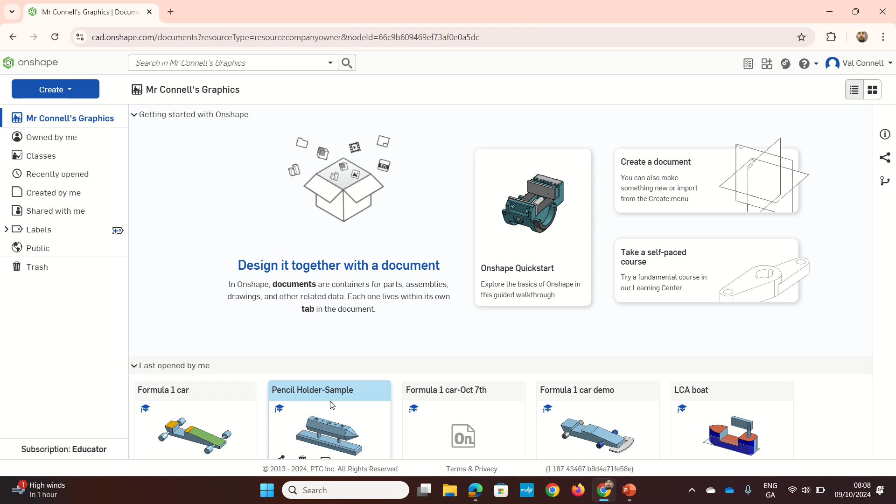Now, welcome to this Onshape video where we're going to make a little pencil holder that we might make in junior cycle wood technology. So you might be familiar with having made something like this in wood technology.

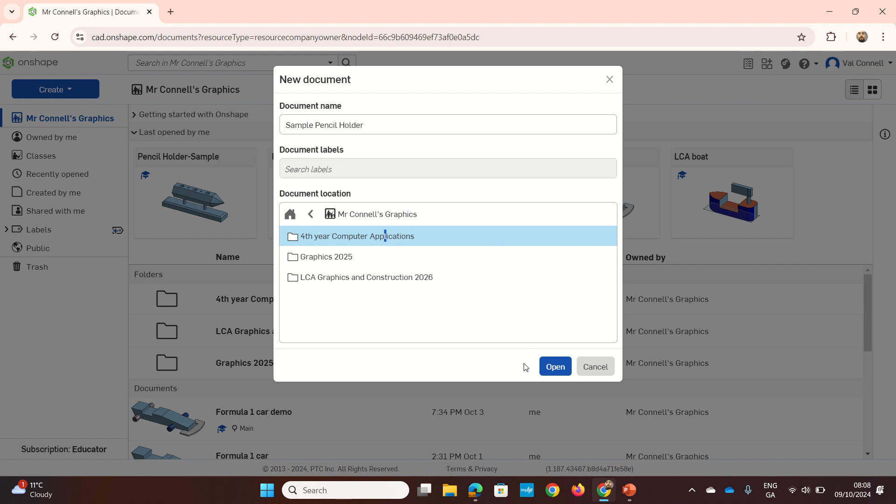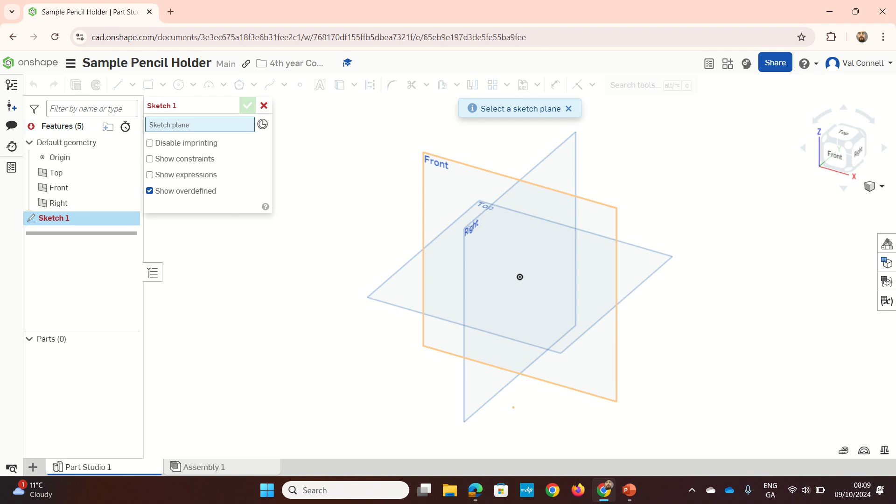Right, so we're going to go to create, document, we're going to name it there and open. Now, we're going to start here by going sketch, and then we're going to select the right plane here. So the right plane down here, we're going to hit that. Then we're going to go up to the cube. I'm going to select the right plane here.

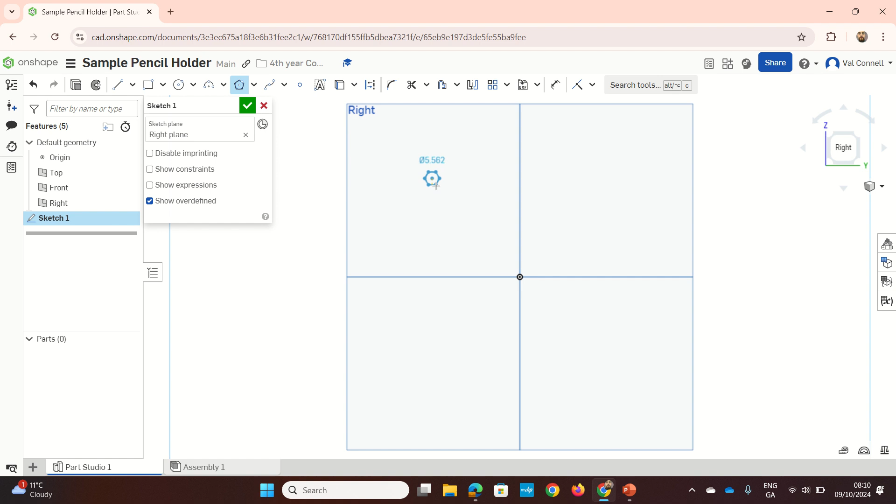Now, we're going to go up to polygon. So the tool is up here. And we're going to left click out here, move our mouse out and left click again. Now, it's going to ask for number of sides, so we'll leave it on 6. We're going to go D for dimension. We're going to left click an edge. So I'm just highlighting the top edge. Left click it, move the mouse up, then click the number. I'm going to type in 20 mm.

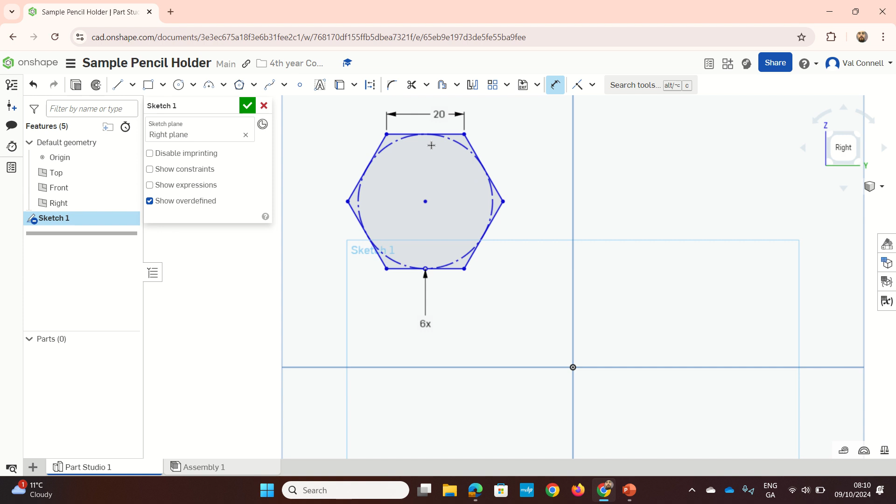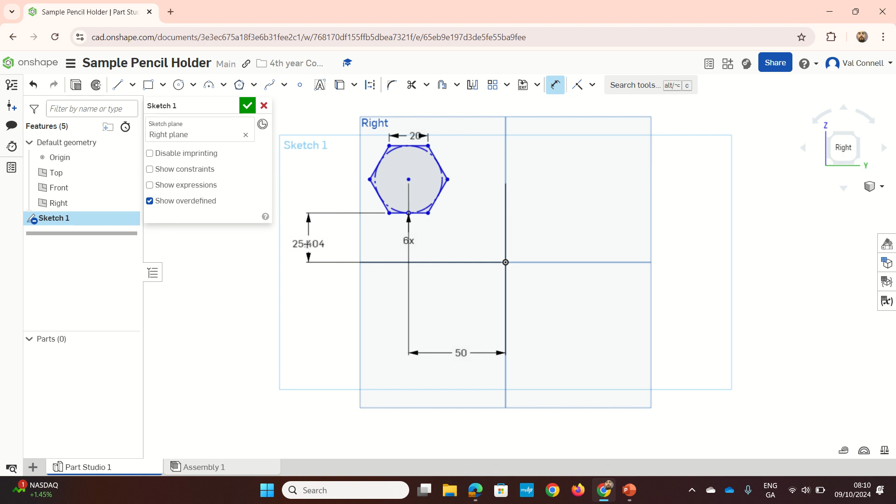Now, we're going to left click the center of the hexagon and left click this right plane here. We're going to move our mouse down. I'm going to type in 50. And then we're going to left click the base, left click up here, and we're going to type in 50 as well and enter.

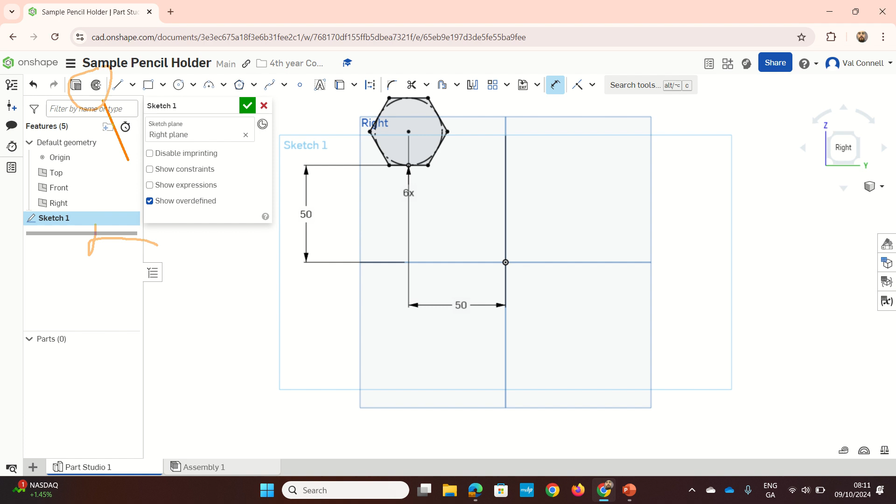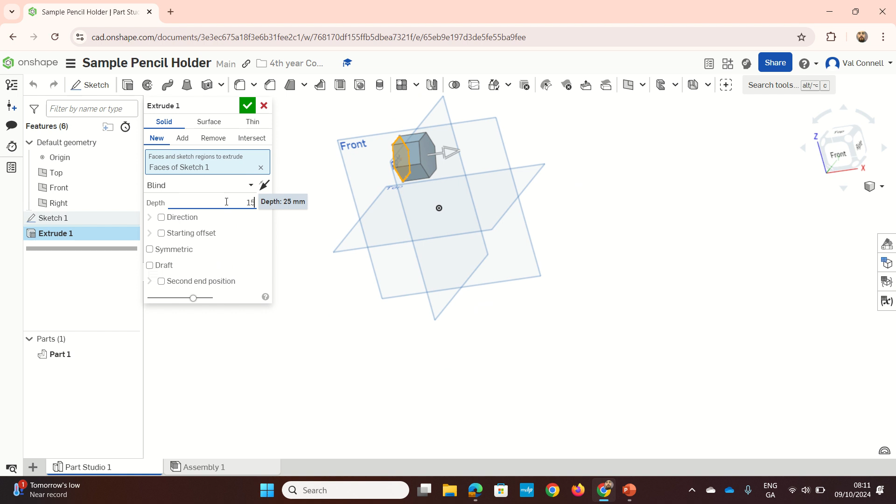Then we're going to go up to our shift and E, or extrude. So this one up here, or that button, you can press the commands shift and the letter E, and then it brings us into extrude. So we're going to type in 150. I'm going to click OK. Now, some of the pencil body is done.

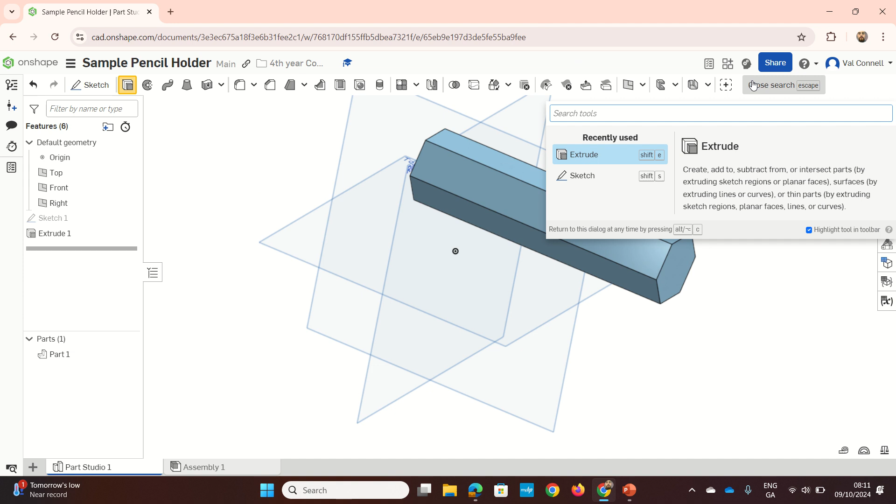Right, now we're going to put a point on the pencil. So we're going to go up to this command called plane. So it's up here. Or if you're looking for it, you can type in the name plane. So I'm going to select down here in the second bar, I'm going to go offset. I'm going to type in 50, click enter. I'm going to select this face here and press OK.

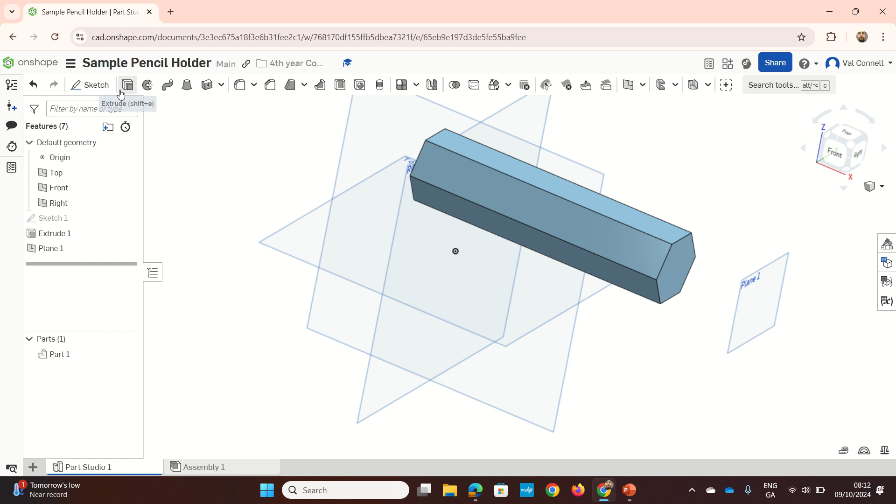Right, now I'm going to go to sketch. So I'm up here at sketch. I'm going to select my plane 1. I'm going to go to the right plane. I'm going to go sketch point here. So point here. Now, I'm going to grab the center here. And now it's proven difficult to find. So I can move my mouse over here and right click on sketch 1 and press show.

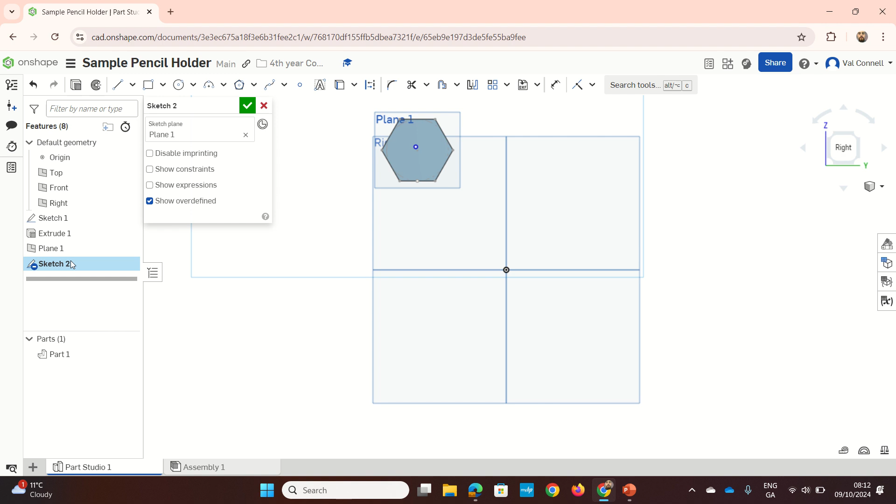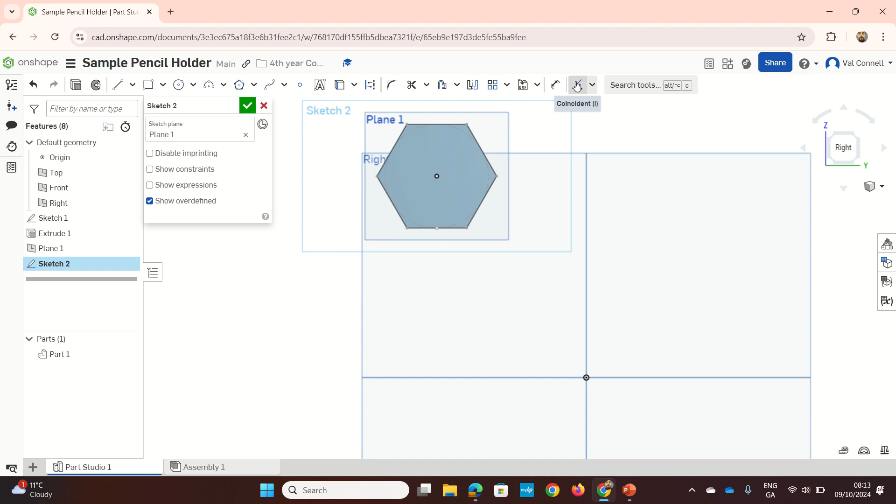Now if I can drag the point there. I'm just going to zoom in. So if I hold down left click, I'm trying to get these to snap on. But it's proven difficult to get it to snap on. So I could left click and left click that and press the letter I. And then they snap on together. So that made them coincident. So that button there. Now I'm going to click OK.

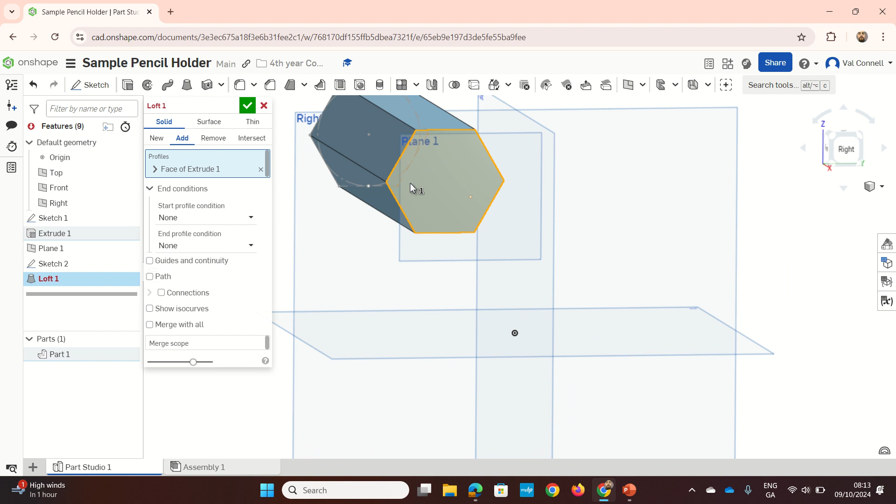Then I'm going to go to this loft tool, which is up here. So I'm going to select loft. I'm going to go add. I'm going to click the face and the point here, vertex of sketch 2. And I'm going to click OK. So that's the tip of our pencil.

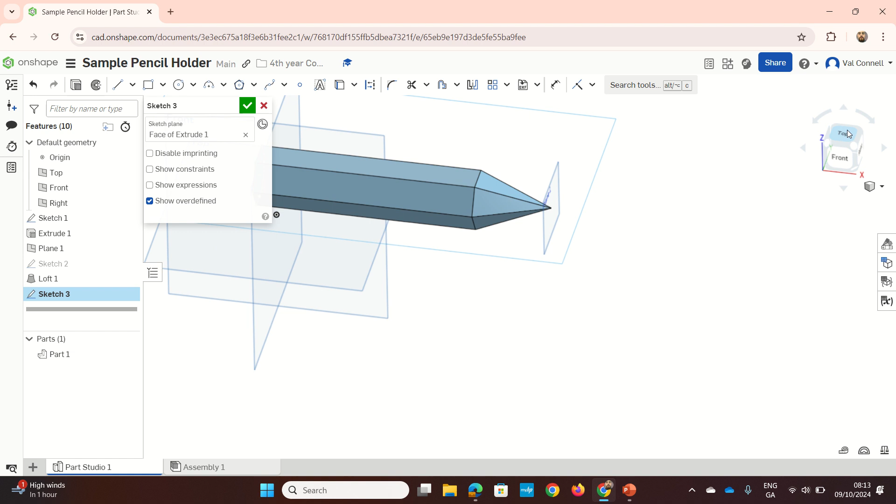Now we're going to put the holes in for the pencils. So I'm going to go up to Sketch. So we're up there at Sketch. I'm going to select the top face. And I'm going to hit the top of the cube here. I'm going to press L for line and Q to turn it into a light line.

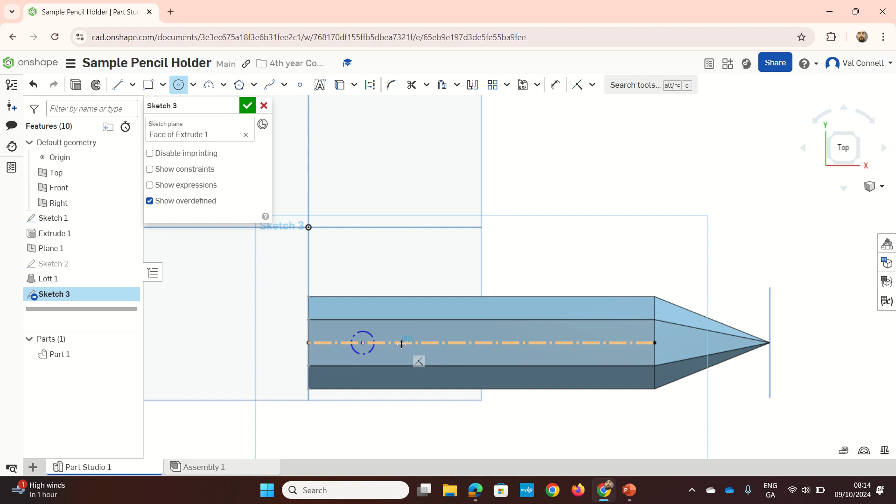So I'm going to left click, move the mouse over to the right. I can press C for circle. So I'm going to draw 1, and I can turn off Q there. 2, 3, 4, 5, and 6. Now, if you want to put in more pencils, that's no problem at all.

You can do. Okay, so you can put in more holes if you want. Now, if that one's still in construction, you can left click it and press Q. Now, size of these holes we'll add in.

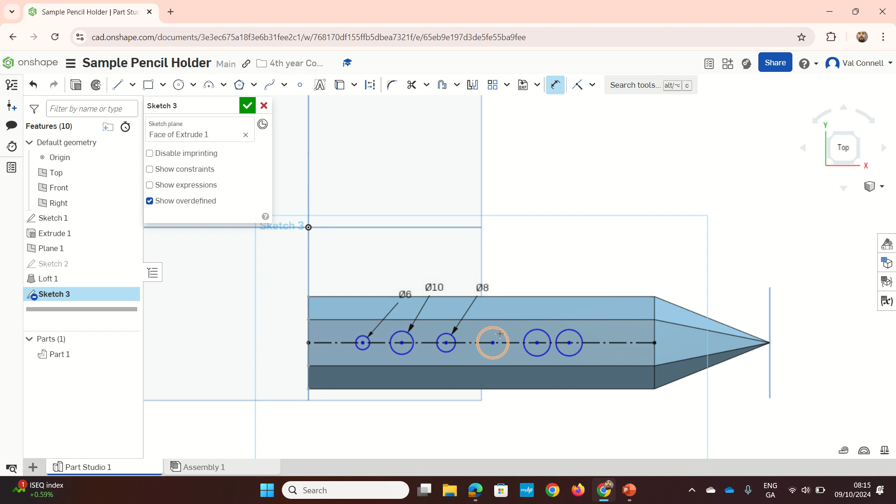So D for dimension. I'm going to give this one the size of 6. This one the size of 10. This one the size of 8. Really, the size of the hole depends on the size of the pencil. Okay, this one the size of 14. 6. So you can choose these sizes yourself, whatever you want to put them in.

Now we're going to dimension these, so I'm going to left click side here. I'm going to dimension that 25, and this is 20. So the dimension tool is still on. So I click the point and that point of the circle. So you're clicking between the points of the circles, you move your mouse up and change the number then. So I change that one to 15. Well, I'm actually going to go back there. There's no point in going to change that back to 20.

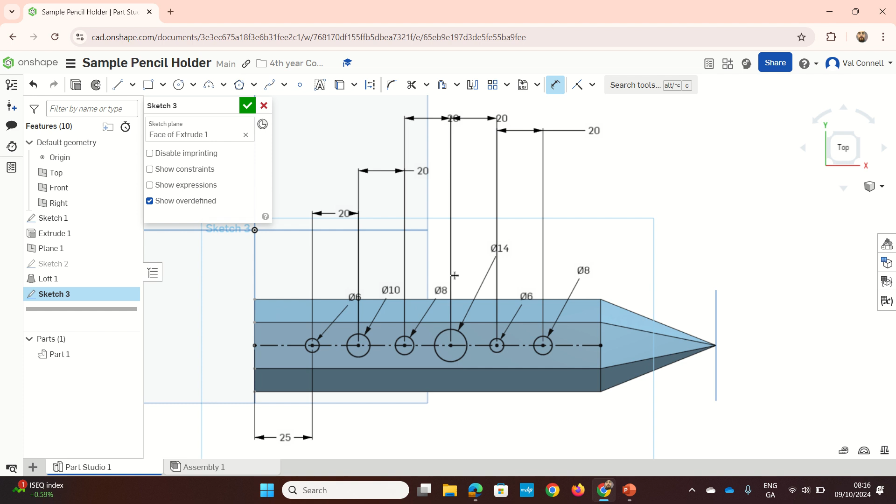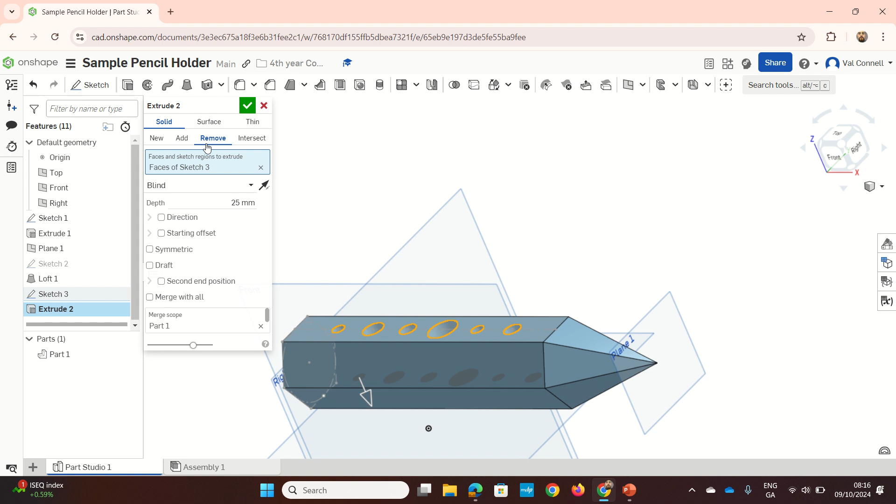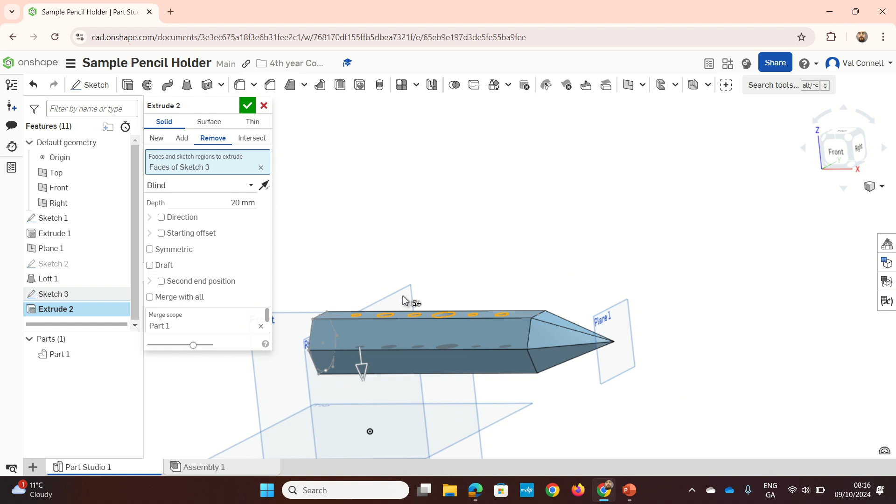Now, we're going to go and cut those holes out. So I'm going to go to extrude up here. You can press Shift and the letter E on your keyboard and bring your mouse up to it. Now, we're going to change this to remove. So it's going down. Now if you brought the arrow down, it'll bring them the whole way through. But we're not going to do that because then it'll just fall all the way through. So we're going to leave this at 20. And we're going to click OK. So we have the holes cut out.

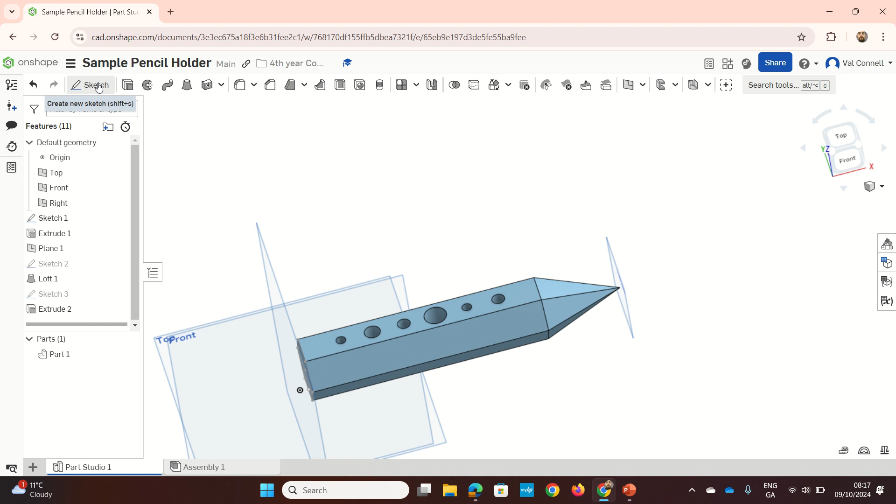And now we're going to drill the holes for our dowels and put in our dowels. And then we'll do our base. So I'm going to go up to Sketch. I'm going to rotate the model around and select the bottom face. So the one directly underneath the holes. I'm going to press the underside of the cube there. I'm going to press L for line, Q for construction line. I'm going to draw a line from left to right.

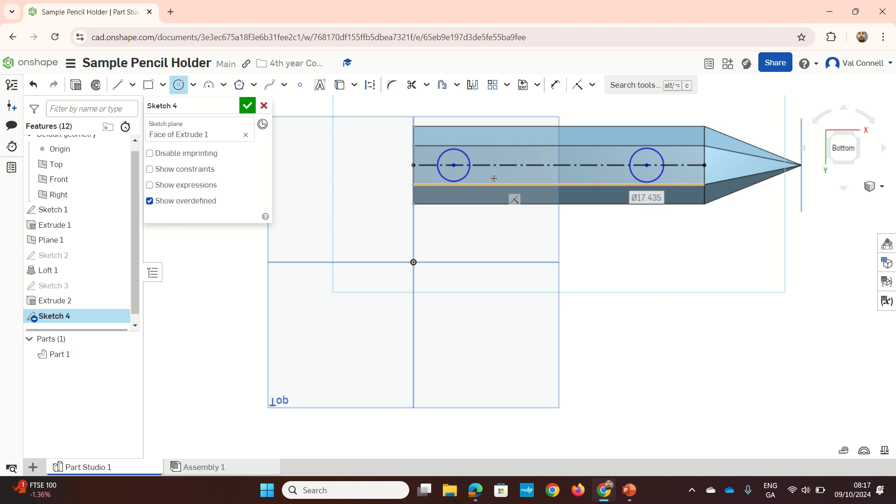Now I'm going to press the letter C for circle, or you can hit the command up here. So I'm going to draw in the circle, and I can press Q to turn off Q to stop it being a light line. Now I'm going to go D for dimension. I'm going to type in 10 for the circle, and we'll give this a distance from the side. So I'm going to left click the circle and the bottom. I'm going to type in 15. And then over here, I'm going to do the same, 15.

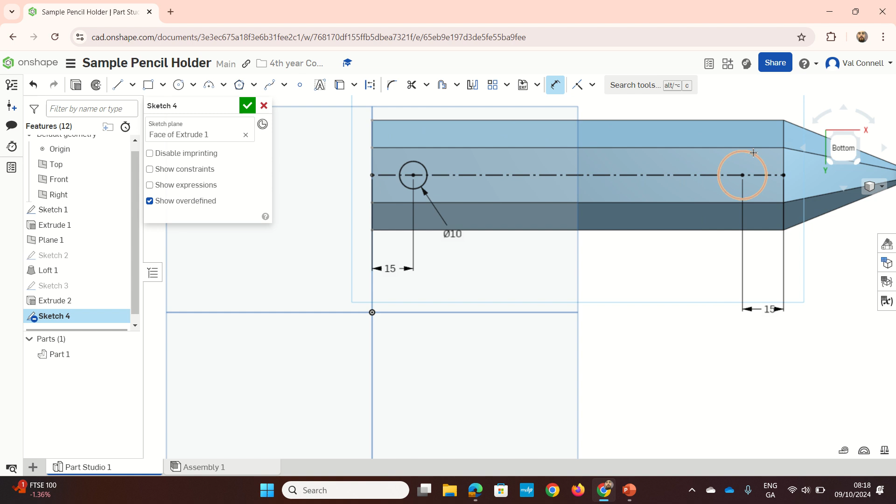And then we can give the size of the circle 10, or another way you could do it is if I deleted that dimension, I could left click this circle, left click the circle on the left and press E for equals. So if you change this dimension, that one on the right goes up accordingly.

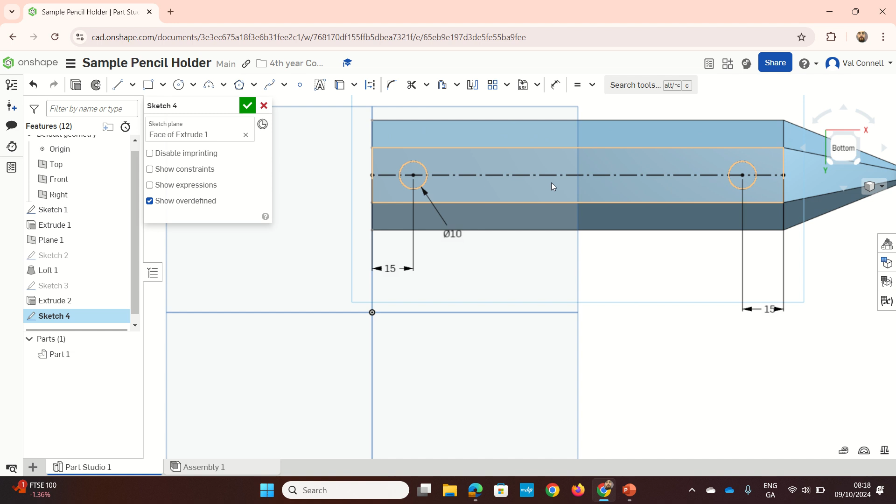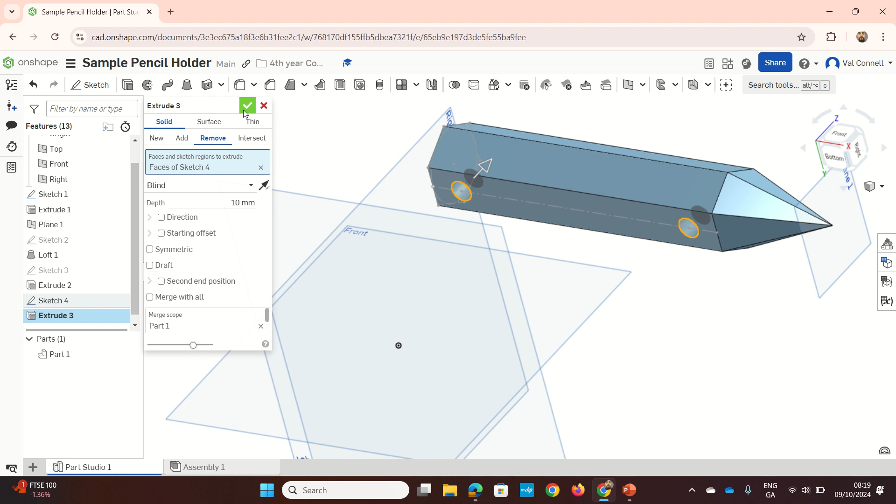Now, we're going to press Shift and the letter E, or we're going to go up to extrude. We're going to select remove. We're going to type in 10. Okay, and then we're going to click OK. And there the holes for the dowels are done. Now we're going to do our base.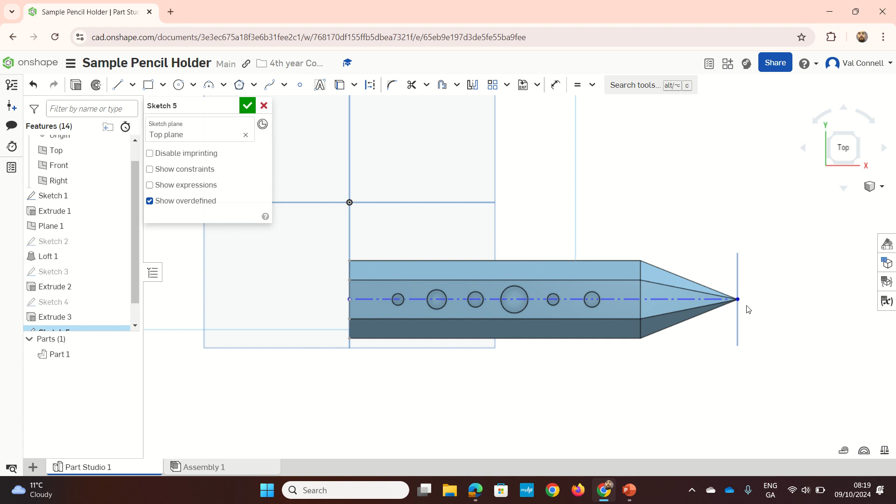Right, so we're going to go sketch, select the top plane, we're going to hit the top cube. Now we're going to press L for line and Q for light line. It's struggling to snap on, but we're going to draw a line from left to right. Okay, now I want to get this to snap into the middle. So I'm going to left click that point of the line and left click this one and press the letter I. And there it's gone. Now I'm going to go up to the rectangle tool. I'm going to hit the drop down arrow and I'm going to go center point rectangle.

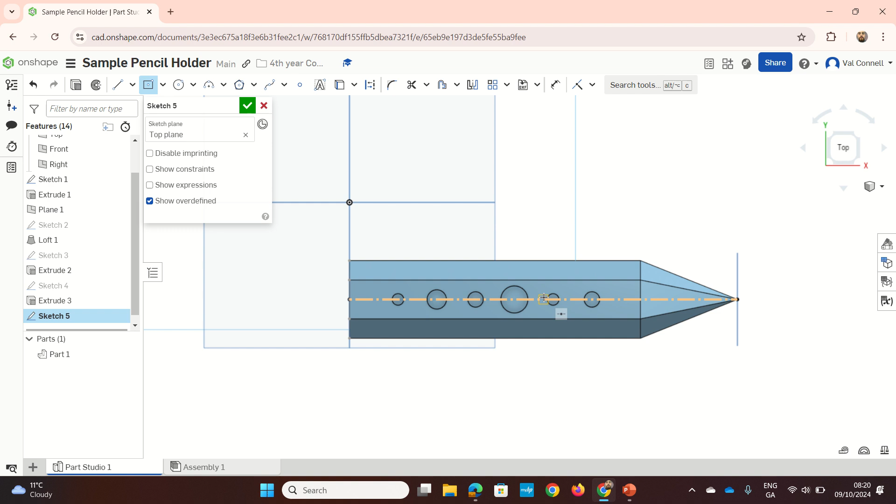Now I'm going to move my mouse along this line here and wait until we see this little square popping up. So you see the little orange square there that popped up. You can see it there. So that's what we're waiting to get. Now when we get that, we left click and we're going to move the mouse outwards.

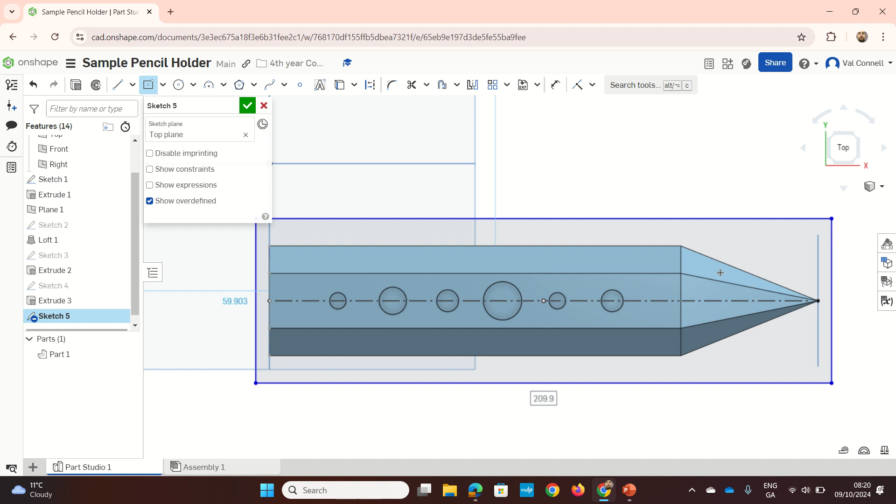Now we're going to press D for dimension. We're going to type in 220, and then we're going to click the left hand side and we're going to type in 44. We'll see what happens here with 44. Yeah, that's all right, 44.

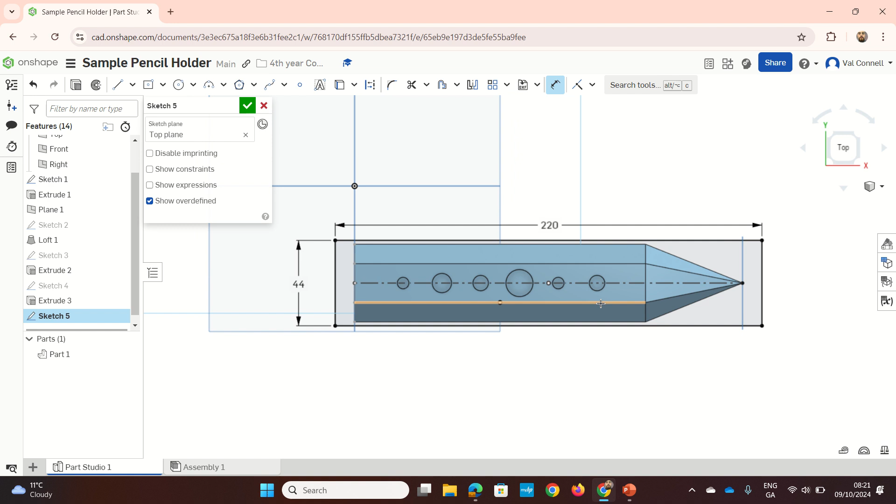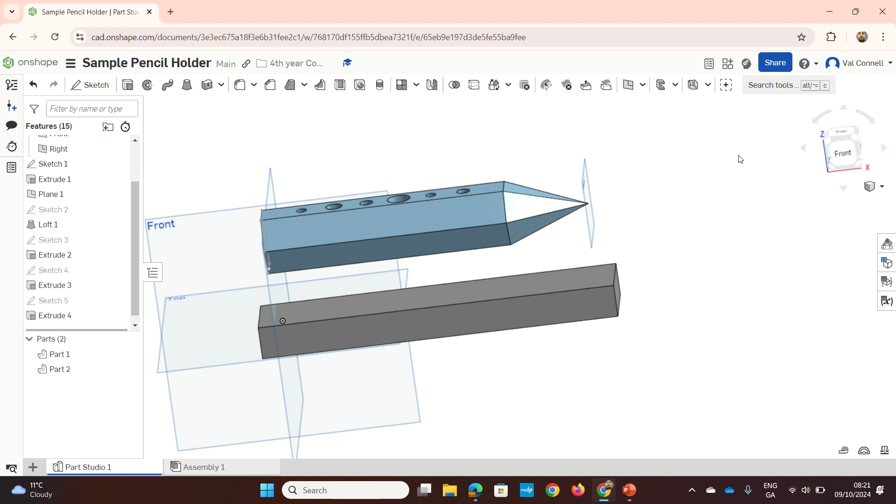Right. Then we're going to press Shift and the letter E and we're going to type in 20 millimeters and click OK. Now this will be our base. Now we have to connect these together. So I'm going to press Sketch, select the top face, and then I'm going to go to this button here and go down to shaded with edges, hidden edges removed.

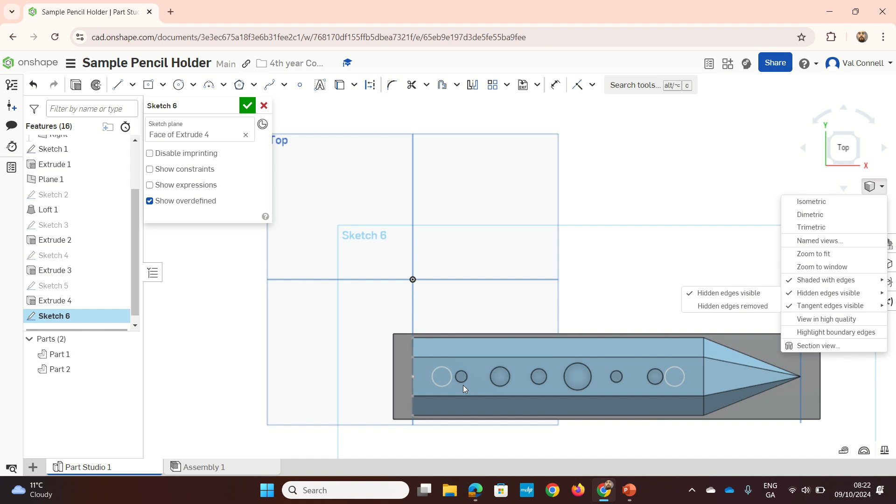So if I go to here and go hidden edges visible. Now these two grey circles here represent the circles on the bottom, that we cut out on the underside of the pencil. I'm going to go circle. I'm going to draw a circle here and draw a circle here.

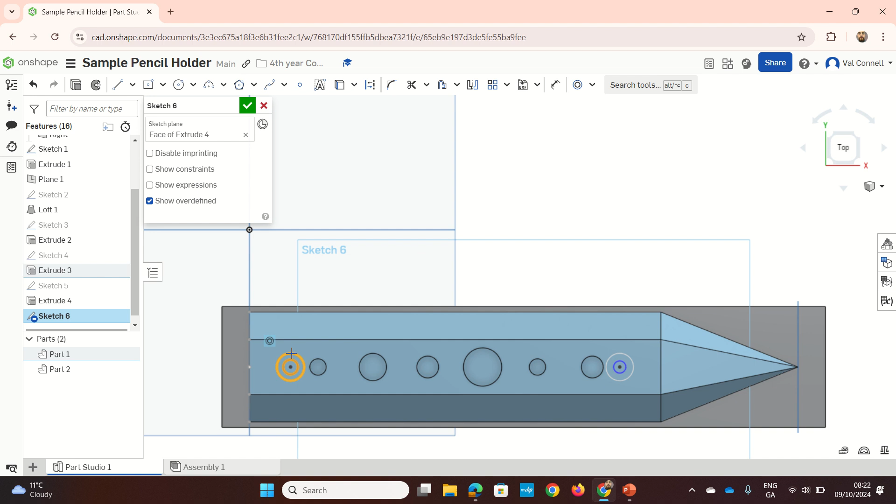Now I can click the circle and click this one and we're going to go up to here. Hit the drop down arrow, concentric, and I'll do the same with this. I'm going to say concentric, and then I'm going to click these two, left click them and press E for equals.

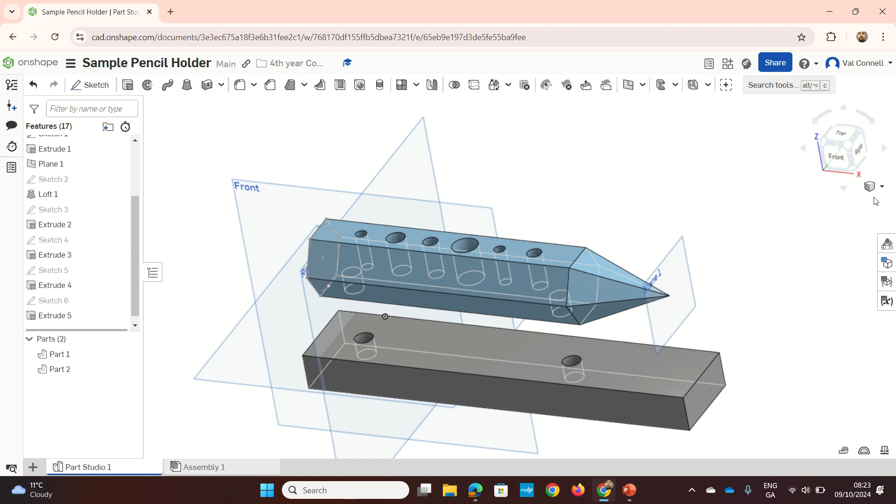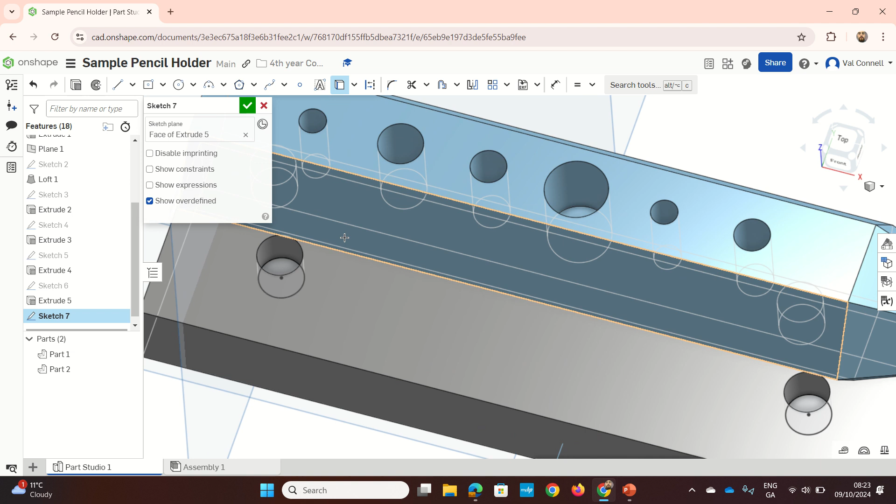Now I'm going to go Shift and the letter E, I'm going to go remove, and we're going to type in 10 and press enter. Now you can see that that's all the hidden detail. Now we're going to rotate our mouse around. I'm going to go sketch, select this face, then we're going to go to this button here, use project curve. Now I can left click the inside, and then we have the circles for the dowel.

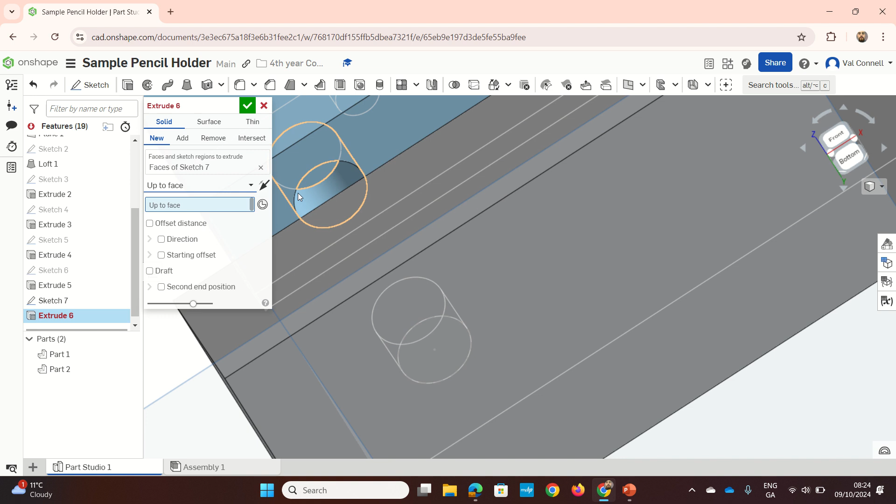We can press Shift and E, and we're going to go to new, and we're going to rotate it about. We're just going to zoom it now until we can see that face there. And we're going to change it to up to face and left click there. And then we're going to press OK. Now, I can go over to here and untick hidden edges visible. There we have our dowels.

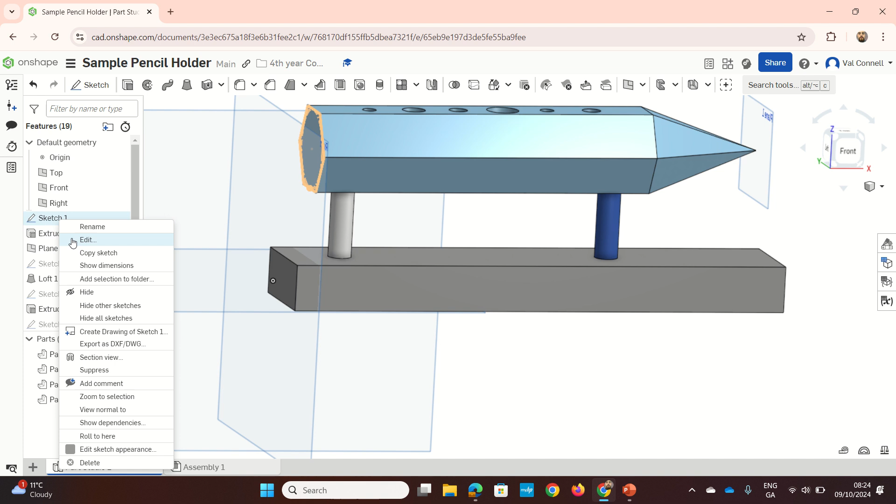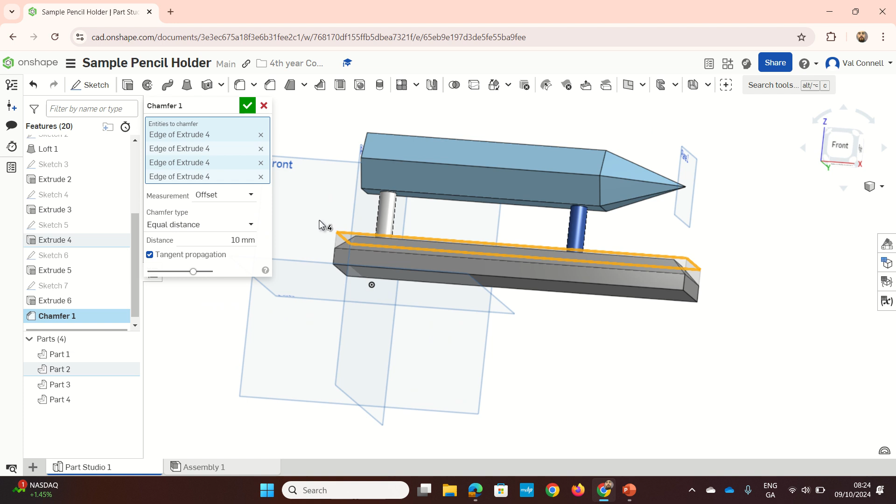Now, we're going to add in some color in a moment. So we can just hide sketch 1, right click and press hide. Now I'm going to go to chamfer, type in 10 millimeters, and we're going to left click these edges here, and then tick OK. And now if we want to change the colors, we can go over to appearance panel,

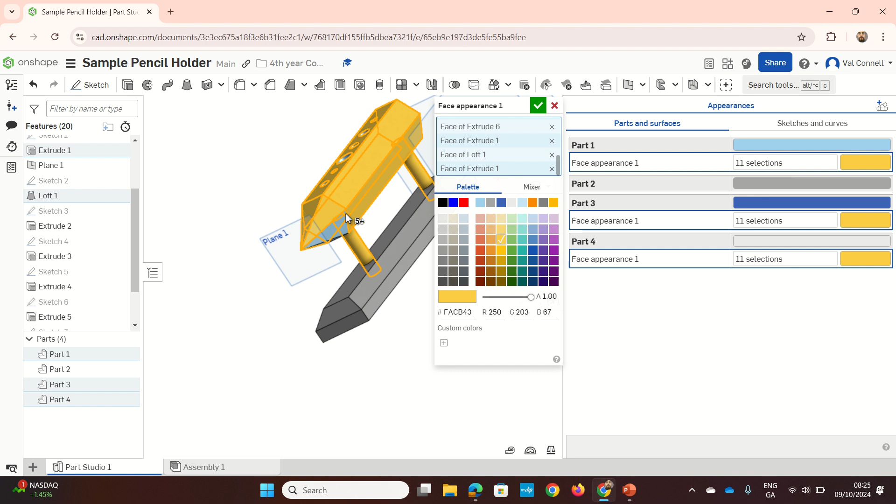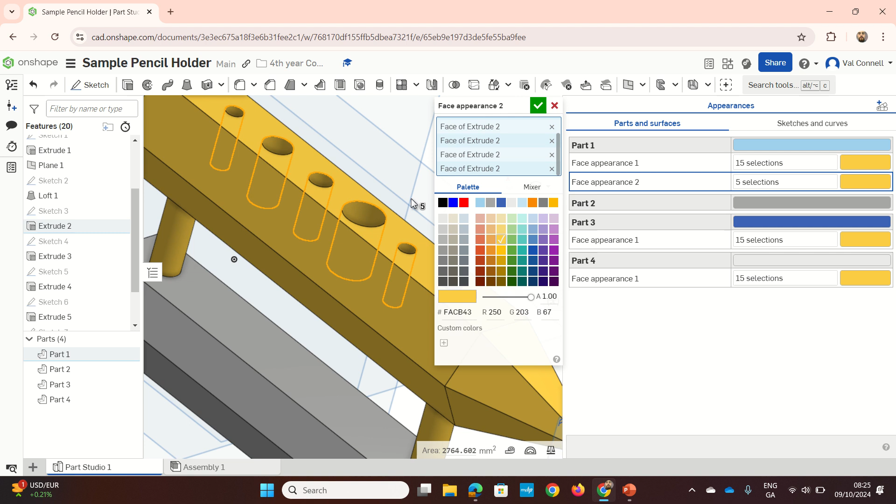go to our add face, and we can give all these faces the color. So you left click all the faces. There I have them done, and then we can do these again. I think we're at the yellow to the inside. You can do them different colors if you want. Enter, and we can do our bottom one. We can do it a different color.

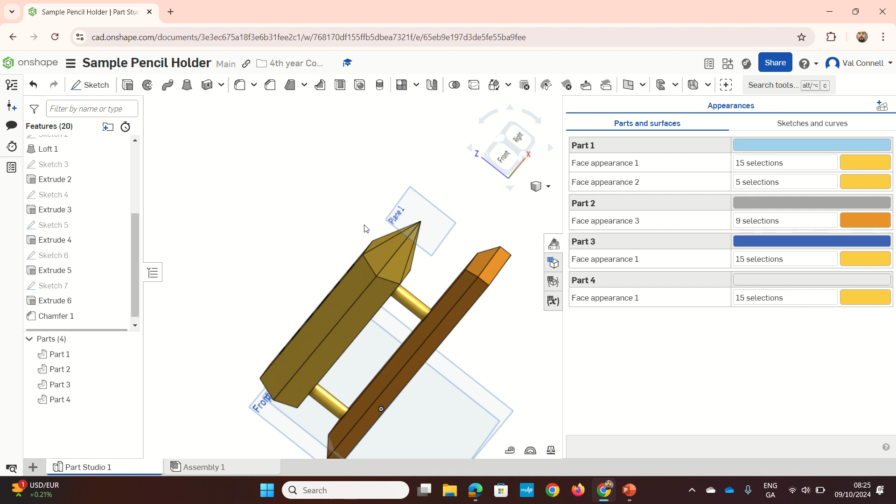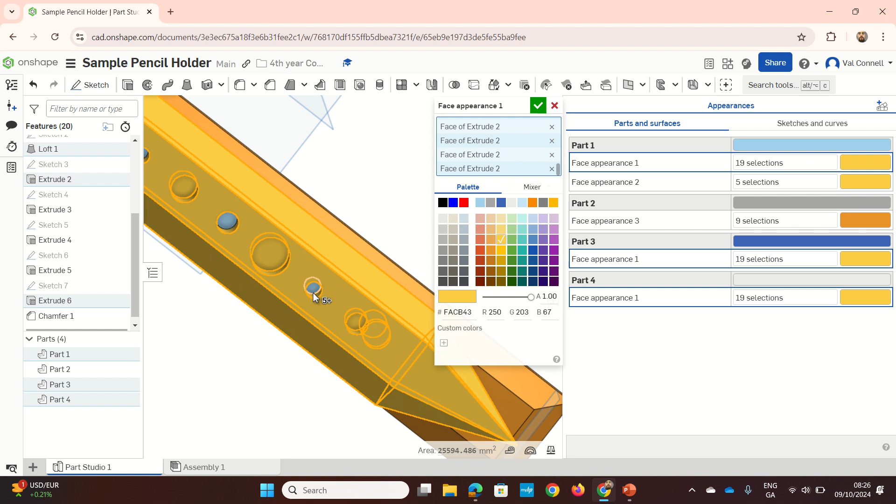And click OK. And then obviously I missed them too. So if you want to continue a particular colour and you missed it, you can just double click on where the selections are and add more to them. There we go. So that was fun. I forgot to do the bottom there.

Oh, I think that's definitely the wrong one. It was this color. Now, there we go. Thank you.